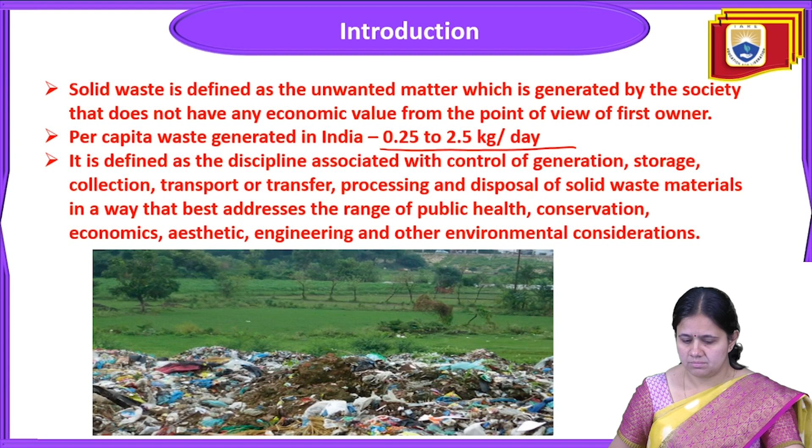Now, what are the types of solid waste? In total we divide solid waste into Municipal Solid Waste (MSW), which is general waste coming from household activity and residential areas; Industrial waste, coming from industries; Hazardous waste, coming from industry or hospitals, which is hazardous in nature such as having very high toxicity, acidic nature, or being reactive; and Biomedical waste, generated from hospitals, nursing homes, or research centers.

Agriculture waste is the waste coming from agricultural activity. Next is mining waste, which comes from mining activity.

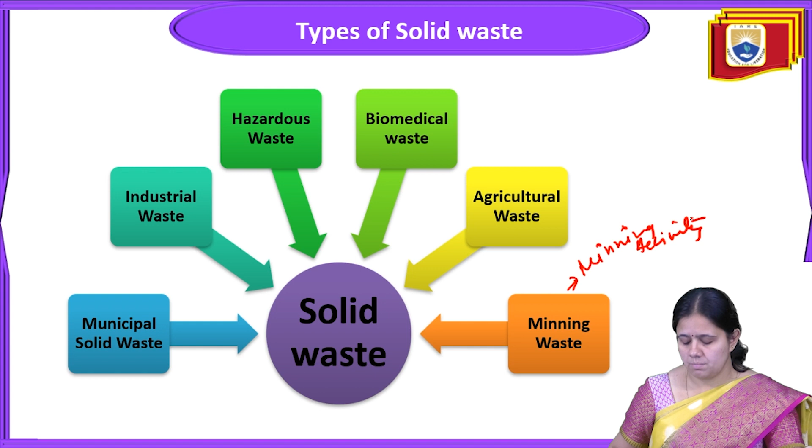Now we'll discuss the sources of solid waste. Solid waste has been produced since the beginning of civilization. Its disposal has increased due to rapid development in industrialization and urbanization, and population growth is also responsible for solid waste generation.

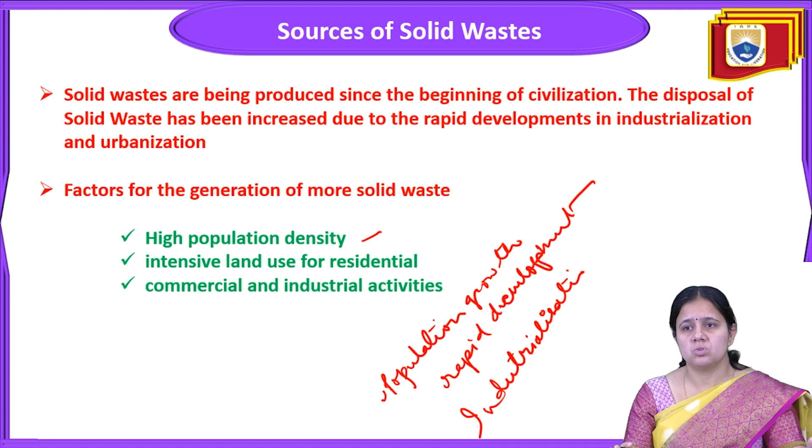Rapid development, industrialization - these are some factors responsible for more solid waste generation. Point one is high population density, because increasing population leads to more intensive land use for residential, commercial, and industrial activities.

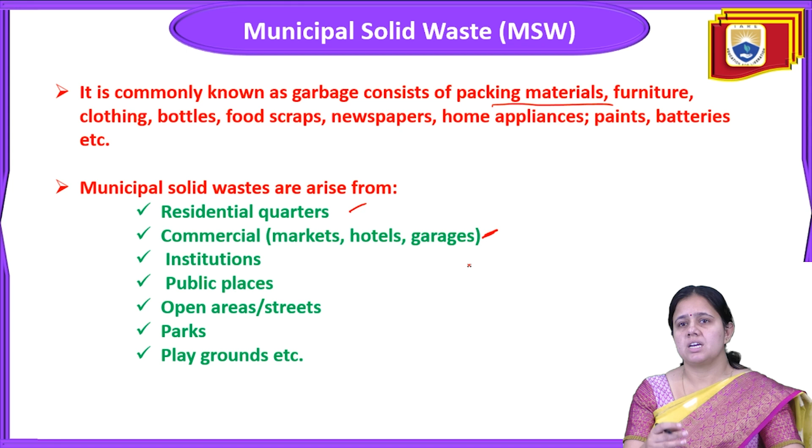Next is the definition of municipal solid waste. MSW is commonly known as garbage, consisting of packing materials, furniture, clothing, bottles, food scraps, newspaper, home appliances, paint, and batteries. Municipal solid waste basically arises from residential quarters and commercial markets like hotels, garages, institutions, public places, open areas, streets, parks, playgrounds, etc.

Now we will deal in detail with this solid waste. Food waste is organic in nature - organic waste.

For organic waste, we will do composting. Organic waste is the waste that is basically generated from domestic sources like hotels, markets, fruit and vegetable markets, or residues resulting during handling and preparation, such as fruit peel and vegetable peel. These are the different categories of municipal solid waste.

Next is the rubbish waste. Rubbish is all that waste which is combustible or non-combustible. Combustible waste are those that can be burned easily, and non-combustible cannot be burned.

Combustible waste contains some papers, cardboard, torn clothes. Non-combustible waste are like glass, crockery, aluminium tins and cans, ferrous metal, some construction waste like that.

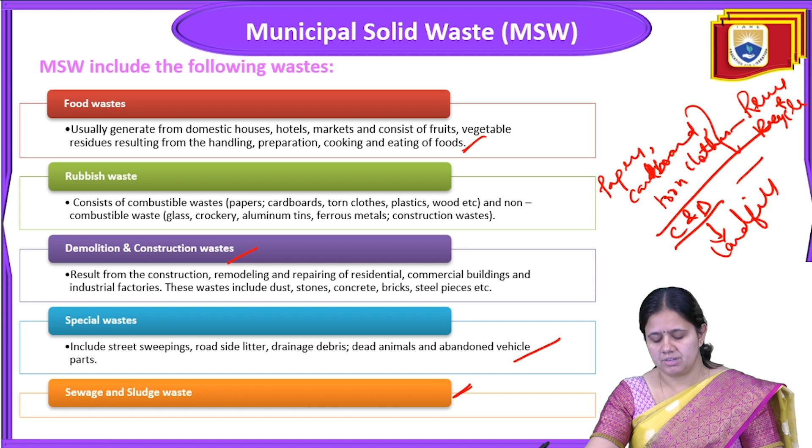Now for industrial waste, we will discuss in detail. Industrial waste comes from activities like chemical industries, metal and mineral processing industries. Radioactive waste is generated by nuclear power plants, which we will discuss in detail - some nuclear waste. Thermal power plants produce fly ash in large quantity.

Chemical industries produce waste which is hazardous and toxic material. Other industries, if producing packing materials, generate rubbish, organic waste, acid, alkali, scrap metals, rubber, plastic, paper, glass, wood, oil, paints, dyes, etc.

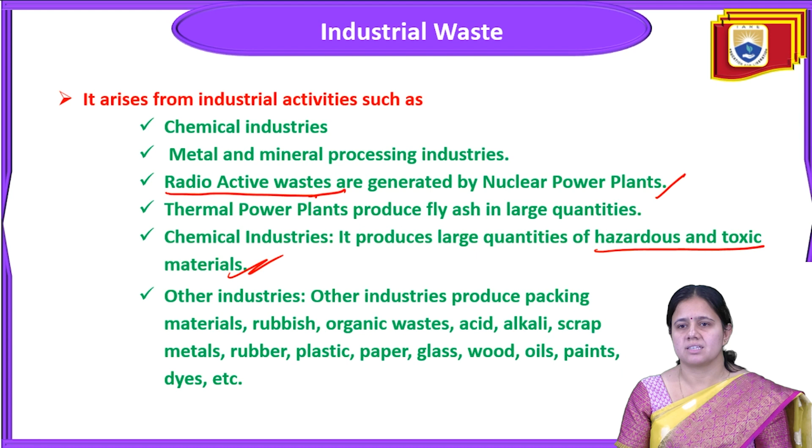Hazardous waste, as we know, is waste which contains hazardous properties and is categorized as hazardous waste. It is solid waste or a combination of waste that poses a substantial danger now or in future to human beings, plants, or animal life, and it cannot be handled or disposed easily. Disposable synergies from hospitals are specific sources identified among hazardous solid waste.

Ignitable material is that which catches fire very easily. Next is corrosive materials that will corrode any hard surface.

Reactive materials undergo rapid reaction with water or other substances and release toxic gases. Toxic materials are like toxic chemicals such as lead or arsenic.

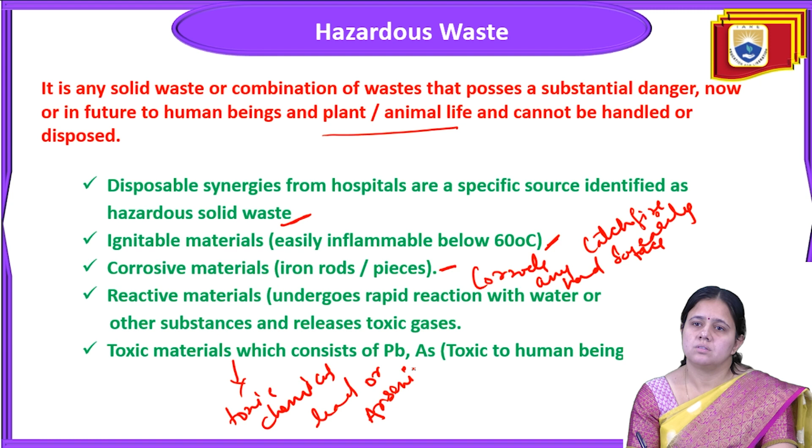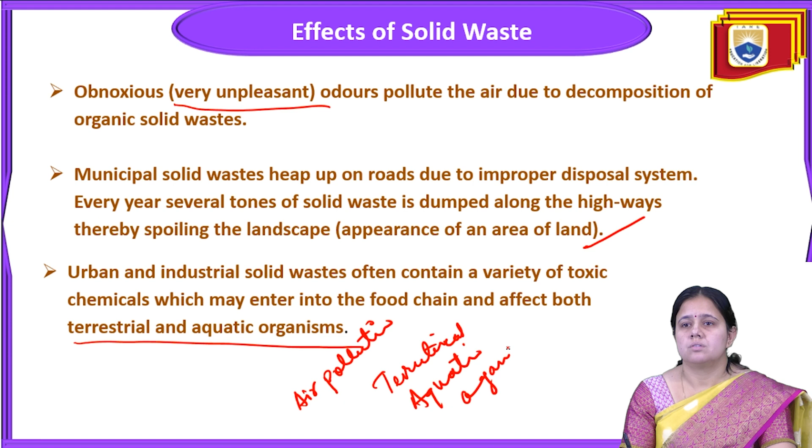This is the main hierarchy involved with solid waste management: first is generation, then collection, then transportation, segregation, then final disposal. This management involves generation of waste, mode of collection, transportation of solid waste, segregation of waste, and disposal techniques. Collection of solid waste may involve lots of steps, as shown in this picture.

First is disposal, then again transfer and transport. After disposal, some collection and transportation steps are there, then loading into the vehicles, and after loading it into the vehicles, temporary storage of solid waste in containers.

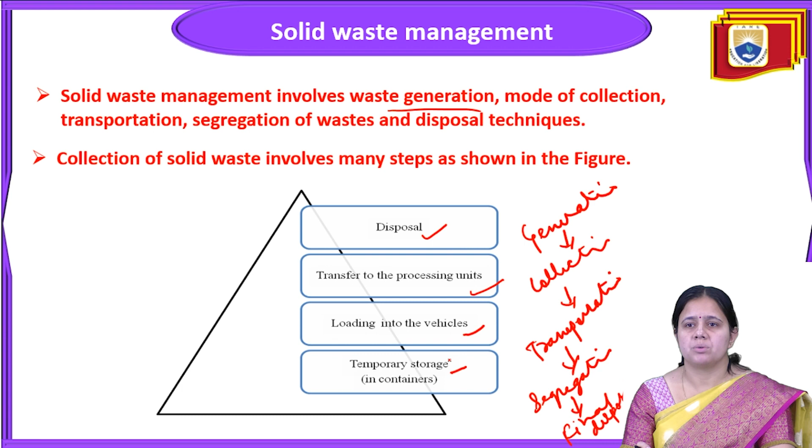To avoid solid waste and reduce its use, there is reduce, reuse, and recycle of raw material - the 3R concept. In this 3R, we have three concepts: reduce, reuse, recycle.

Reduce means use of raw material is reduced, so the generation of waste is also reduced. Reuse: refillable containers that are discarded after use can be reused, and rubber rings can be made from discarded cycle tubes, which reduces waste generation during the manufacture of rubber bands.

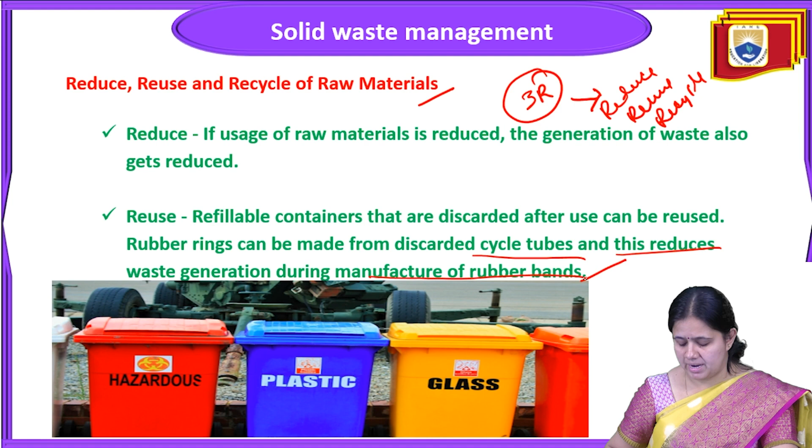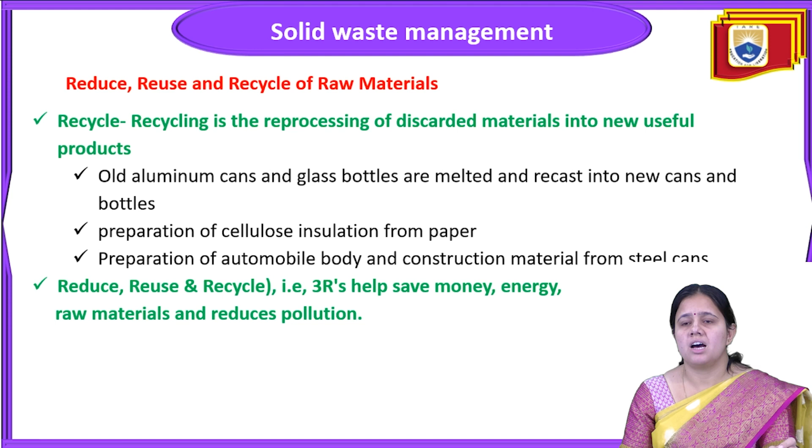Recycling is the reprocessing of discarded material into some new useful product. For this, old aluminium cans and glass bottles are melted and then recast into new cans and bottles. Papers can be reused for the preparation of cellulose, and automobile bodies and construction materials can be prepared from steel cans. In this way, the 3R helps save money, energy, and raw materials, and also reduces pollution.

Next, we discuss landfill. Landfill is the engineered way of disposing solid waste in an area. Solid waste is placed in the sanitary landfill, in which alternate layers of 80 centimeter thick refuse are covered with selected earth fill of 20 centimeter thickness. This selected earth fill is either humus, compost, or soil.

After 2-3 years from the landfill, the solid waste volume will shrink by 25 to 30%, and the land is used for parks, roads, and some small buildings also. This is the most common and cheapest method for waste disposal, and it is most employed in Indian cities, on the outskirts of the city.

On the landfill, the waste should be disposed of and placed in trenches or cells, so that after 2-3 years the volume will shrink and settle down. Some chemical reaction will start inside the landfill - sometimes aerobic or anaerobic processes start decomposition. This is the most common and cheapest method of waste disposal, and it is mostly employed in many Indian cities.

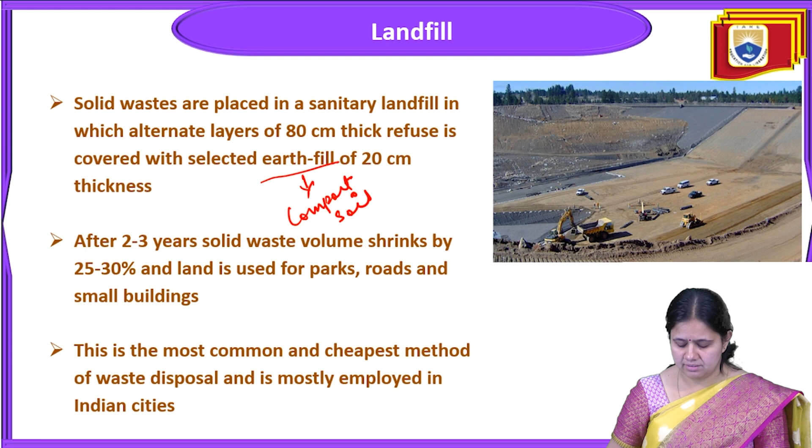We'll discuss the advantages and disadvantages related to landfill. The advantage is it is simple and economical. Segregation of waste is not required. Landfill area can be reclaimed and used for other purposes, converting low-lying marshy wasteland into useful area. Natural resources are returned to the soil and recycled again.

Disadvantage is it requires a large area of land, and land availability is away from towns. Transportation costs are high. It leads to bad odor if the landfill is not properly managed, as methane gas will be produced from the landfill, which is the reason for the bad odor. Landfill area will be a source of mosquitoes and flies, and it will require application of insecticides and pesticides at regular intervals.

Landfill area is a source of mosquitoes and flies, and it requires application of insecticides and pesticides at regular intervals. It can sometimes cause fire hazards also, due to the formation of methane during wet weather or rainy season.

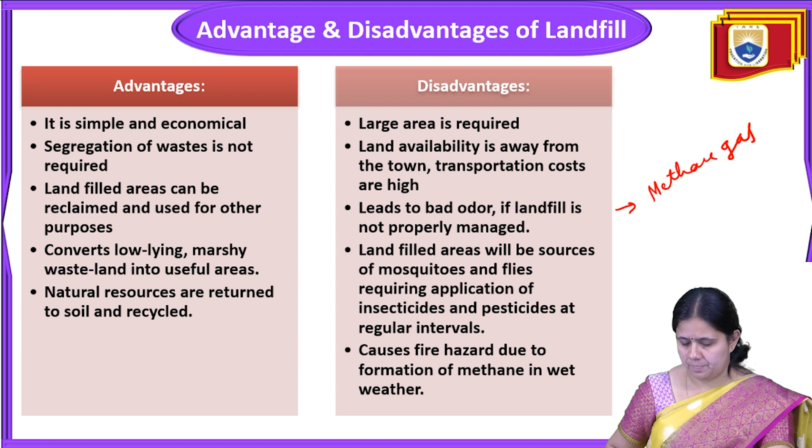Next is incineration. Incineration is a method of municipal solid waste disposal where waste is burned in a furnace called an incinerator. Combustible substances such as rubbish, garbage and dead organisms, and non-combustible matter such as glass, porcelain and metals, are separated before feeding into the incinerator. The heat produced during burning of refuse is used in the form of steam power for generation of electricity through turbines. This is an example of waste to fuel.

The heat produced by burning waste in an incinerator is used in the form of steam power for generation of electricity by moving turbines. Municipal solid waste is generally wet and has a high calorific value, so it has to be dried first before burning. Waste is dried in a preheater, from where it is taken to a large incinerating furnace called a destructor, which can incinerate about 100 to 150 tons per hour.

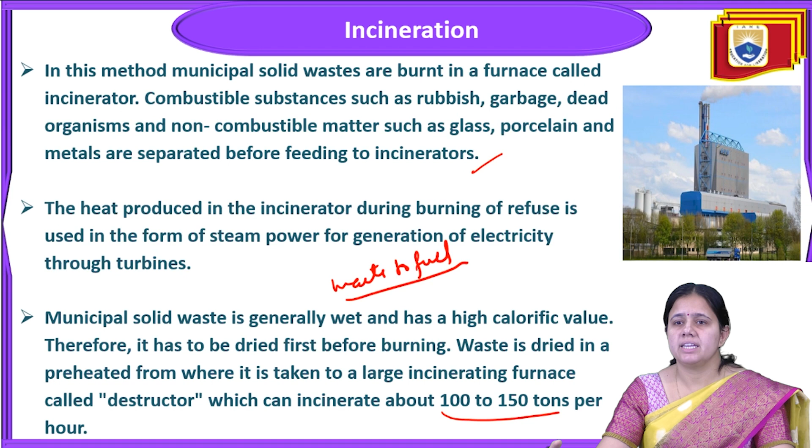Waste that is generally wet and has high calorific value has to be dried first before burning. So before burning it should be dried, and this pre-treatment is required. The waste is dried in a preheater, then taken to a large incinerating furnace called a destructor, which can incinerate about 100 to 150 tons per hour.

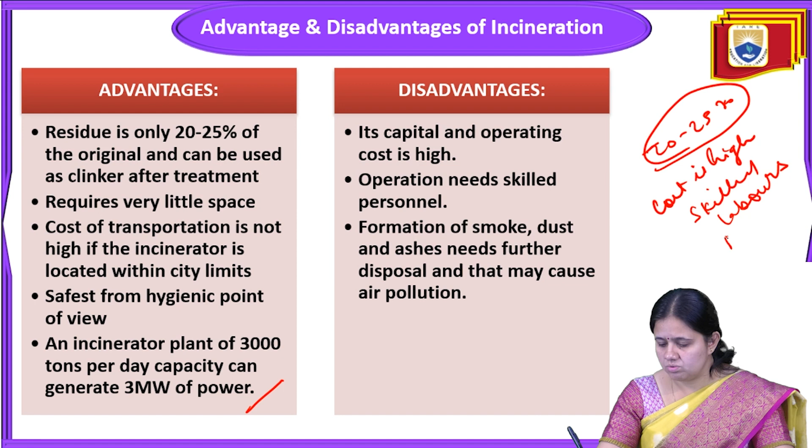Disadvantage is that it has a high cost and requires skilled labor. Formation of smoke, dust and ashes needs further disposal, and that may cause air pollution also.

Next is the method of composting. In this method, organic waste is converted to compost, converted into fertilizer by biological action. Separated compostable waste is dumped in underground trenches in layers of 1.5 meters and finally covered with earth of 20 centimeters, then left for decomposition. Within 2 to 3 days, biological action starts. Organic matter is then broken down by actinomycetes bacteria and a lot of heat is produced. This increases the temperature of the compost to 75 degrees Celsius, and the refuse is finally converted to a brown colored odorless mass called humus.

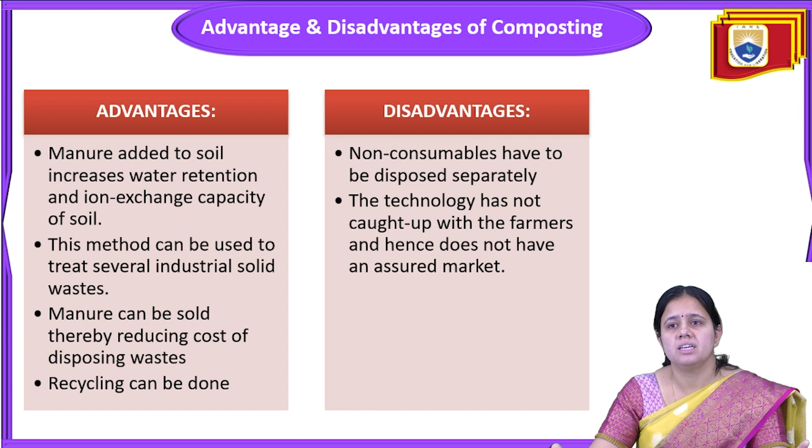So this is the end of the lecture. Next class I will discuss in detail about solid waste management handling rules - why these rules have been made and what is the requirement for these rules. Thank you for today's lecture.